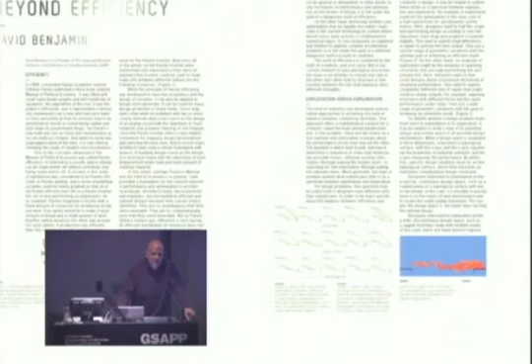Designing design is the first topic. This is something I've been thinking about for a very long time and teach studios here about — really about the role that algorithms play in our design process, and the fact that they're becoming so prevalent that in some ways it's no longer an option to remain distant from that. The design of a design system itself is becoming a problem for architects — we can no longer just allow software to structure the context in which we design, but actually we have to get involved.

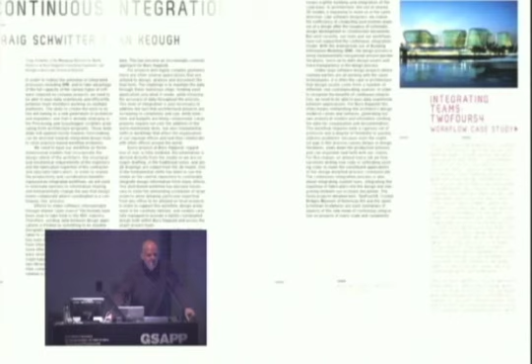Many of the authors talk about this. Some present case studies where they invent custom tools within their office to do task-specific jobs, often about filling a gap that a standard software package can't do—taking information from one software package and having it communicate with another. In many cases, you'll see enormous opportunities open up.

In this case, the diagram on the right is an interesting output from the computer model, taking digital information from the model and coming out with analog instructions to send to a loom to weave this net. So the workflow was about stepping out of the digital into the analog.

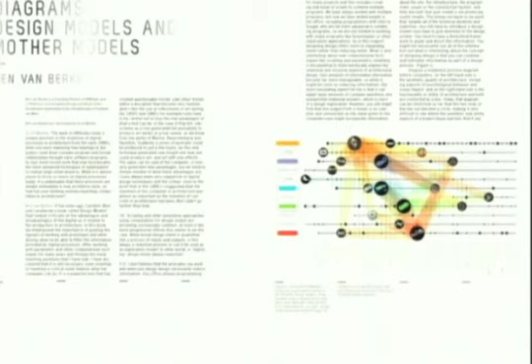That kind of play back and forth between digital, analog, digital, manual is something I think is just starting to really be talked about, and something I think is going to be very important as this technology develops. The first few years were really about making it digital, full-blown attempts to create pure digital workflows in design and construction. And I think the reality that's starting to emerge is that it's simply not possible or even feasible.

So the question then becomes, when do you step in and out of this process? And it's something which, again, is more of a design problem than a technology problem.

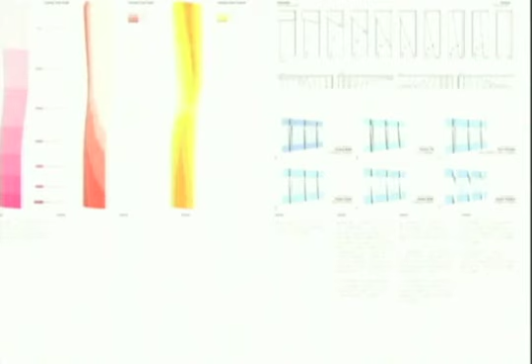Some of the authors are skeptical. I purposely invited people to contribute that weren't just gung-ho about the technology, but were rather reflective about its potentials and its limitations. Neil Denari is one of them. He's associated with digital processes, but having built several projects now, he's begun to reflect on how far the technology can go.

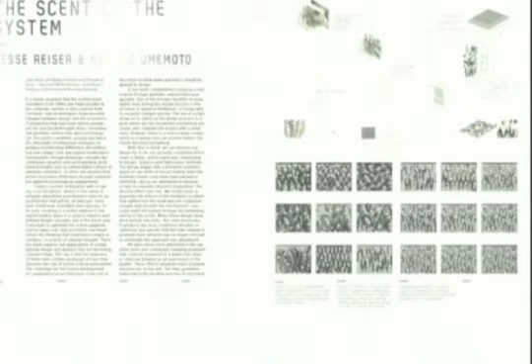One of the more interesting discussions I had was with Reiser Umemoto, who said right from the start, this is not our world, and we're very skeptical. He used an interesting analogy to describe that: it is absolutely possible to derive mathematical formulas from a Mozart sonata, but debatable whether you could run the process in reverse and come out with a Mozart. His point being that he was questioning the capacity of digital tools to actually embrace and encompass the full range of possibilities that lie outside of the digital.

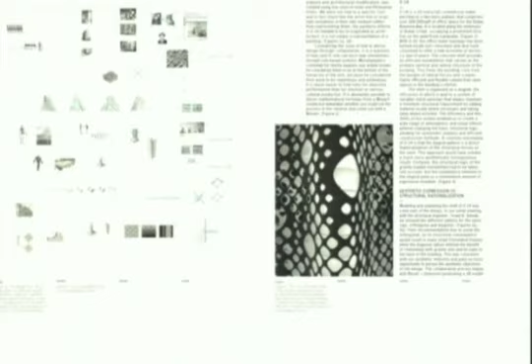The next section is designing assembly. This topic directly relates to digital fabrication, but I purposely didn't use that term, with the intent of trying to move beyond just this idea of file to fabrication and looking at the possibilities of architects starting to think about assembly processes through fabrication.

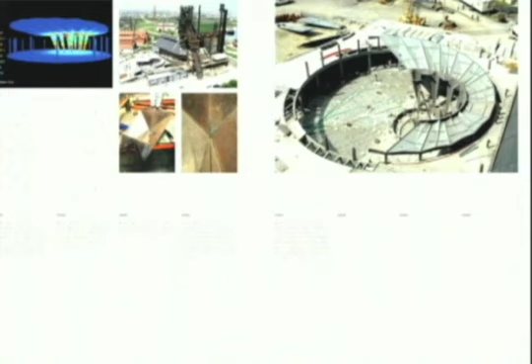So instead of just thinking about drawings that can be sent to CNC machines, it was really about understanding the broader implication of that, and understanding how assembly logics could be embedded in design processes by taking that information and front-loading it in a design process.

Several of the authors deal with this. Barkow Leibinger has done some very interesting work where they literally look at the specific constraints of machines and then pull that into their design process to generate concepts. So designing assembly is, I would say, the middle part of this process of design, assembly, and construction and industry.

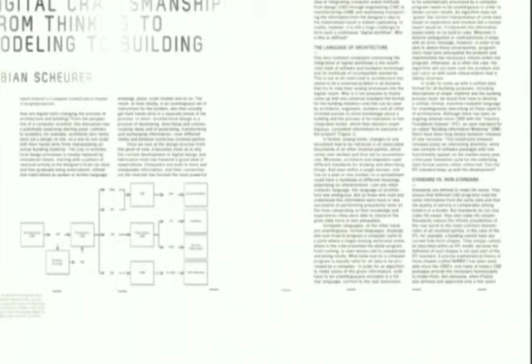A couple of the contributors fall into the category of consultants who, at this point in the development, play a critical role in bridging design and construction. Firms like Design to Production and Gehry Technologies essentially play the role of taking design ambitions that architects come up with, linking it to processes of fabrication, and digitally making that connection.

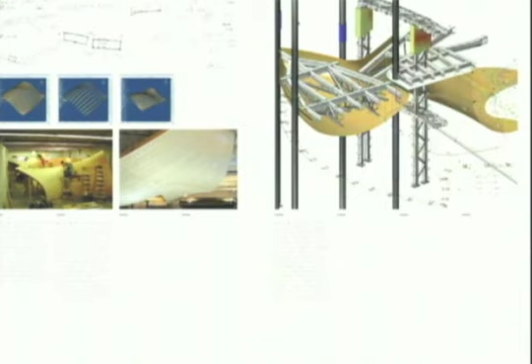The partner from Design to Production told an interesting story about the project shown in the book, where he was hired by a contractor who had bought out the project and had no idea how to build it. So they worked very carefully with a timber construction company on the logistics of the site, took all these bits and pieces of information important to develop the workflow, encoded that in the process, and developed a link between the design drawings and the fabrication drawings. Gehry Technologies works much in this vein too, and is trying to expand their services to deal with larger organizational issues around projects.

It's also interesting in this drawing that sketches are still alive. Sketching is in some ways critical in clarifying design intent in order to translate it into code. So a lot of people worry that the direct hand-eye coordination connected to sketching is not part of this process, but in fact it very much is.

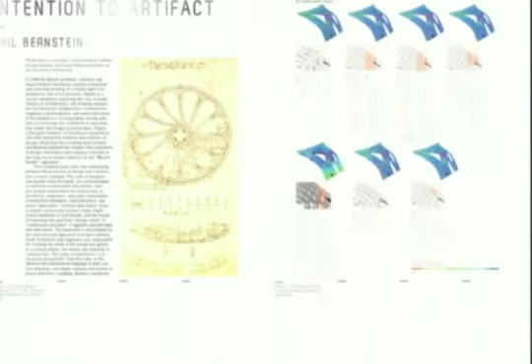And then the last part is designing industry. This section of the book looks at larger organizational issues occurring in industry around integrated design and construction processes. It looks at the current status of developments around BIM and IPD, but also tries to go beyond that, taking an opportunistic look at what is possible through these processes, not limiting it to what is currently being deployed in industry.

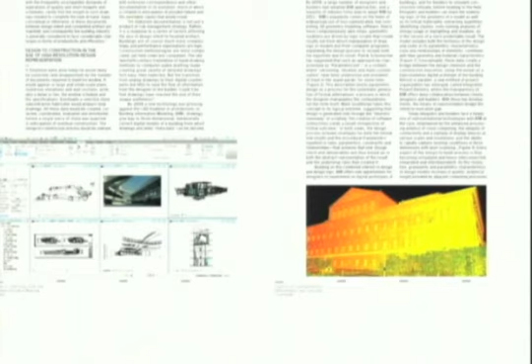So in some ways it takes a position that BIM and IPD are addressing logistical issues within design and construction, but it's not clear what impact it has on design yet. That's something that as architects we have to be very careful and aware of. Offices like Morphosis, who have always had a very intimate relationship with their fabricators long before digital processes, have just been able to take that interest and relationship to another level.

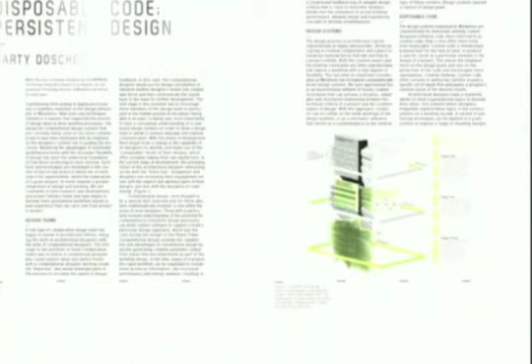Related to the role architects can play in this, Thom Mayne, in one of the discussions we had in preparing the book, made the point that if architects don't continue to design challenging projects, even with an aggressive aesthetic agenda, the tendency of this technology left to industry alone will lead to very generic processes and results. He took an adamant position that without design, without architects, the potential of all this technology runs the risk of gravitating toward very generic results.

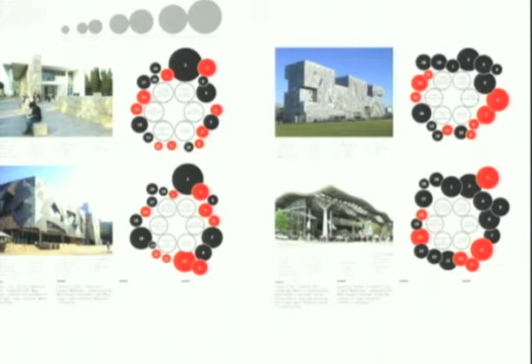And then finally within this category, Paolo Tombesi, who in some ways is the outsider in this group, takes a very different look at the topic. He really analyzes and theorizes the construction industry in ways that are not very common, honestly, in the States. He's based in Australia and does very interesting work looking at the after effects of construction, analyzing labor relationships and contractual relationships. He understands what happens after the fact and then generates a database that potentially can become part of an information model.

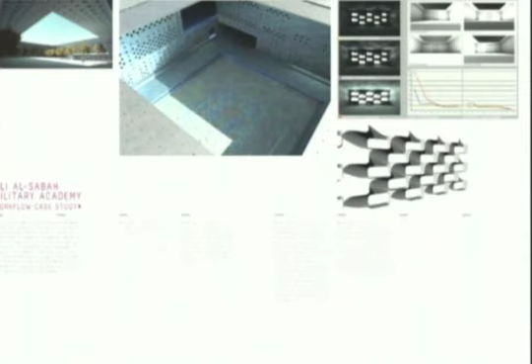And this is an aspect of the industry side which is largely untapped but has enormous potential. In other words, an information model is just that—it will take in whatever information someone finds useful. And the more we expand that, the more I think we begin to uncover new potentials.

And the final contributor, John Nastasi, presents the work from the Product Architecture Lab at Stevens Institute, in some ways one of the pioneering schools around this topic. They've been doing this work probably for 10 years that a lot of people are just starting to see. In some ways they're very much ahead of the game in trying to understand the relationship and potentials between academia and industry. I think it's something a lot of schools are touching on and struggling with right now, including this one.

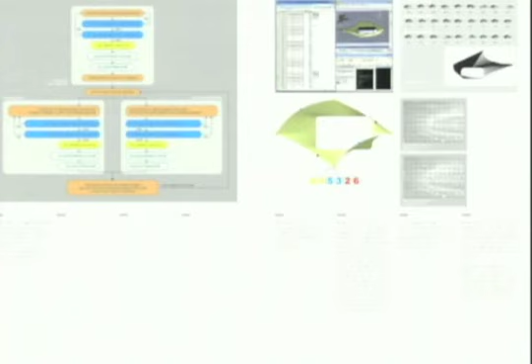So we'll go to the other three presentations and then have a brief discussion. Three speakers tonight, and I'm very excited about the three people that have agreed to do this, and that they come from very, very different perspectives on this topic.

David Benjamin, who anybody who goes to school here knows very well, is the director of the firm The Living and director of the Living Architecture Lab here at Columbia. He's also a professor here. What I find really interesting about David's work is that he sort of misuses optimization software—he takes software intended to be used for very specific processes and tasks and tries to open up the potential of that to a very wide design space. It's something that I think is very unique and has enormous interest and potential.

Shane Burger is going to speak second. Shane is a kind of veteran around this topic. He was with Grimshaw Architects when the book was done. He's since moved to Woods Bagot and is the director of design technology there. He's also the director of the Smart Geometry Group.

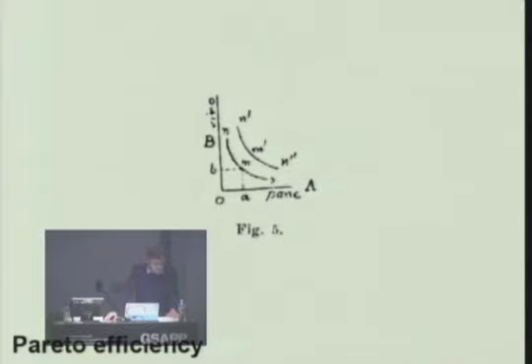But I also think it's very relevant for architecture and the use of digital tools today. One of the concepts Pareto came up with in this book was called Pareto efficiency, shown by this graph here. Pareto efficiency referred to a society where nobody can be made better off without making somebody else worse off. A society in this state of equilibrium was said to be Pareto efficient or Pareto optimal, and a series of potential societies could be graphed so that all the Pareto efficient ones fell on a Pareto frontier, the series of best performing arrangements.

As an example, shown in figure 5 in the book, Pareto imagined a society with a fixed amount of resources for producing bread and wine, shown on the X and Y axis. For this simplified version of society, one option would be to make a large amount of bread and a small amount of wine, another option would be vice versa. For each option, if production was efficient, that version of society would become a point on this Pareto frontier, this curve here. Since all the points on this curve were mathematically equivalent and optimal, this frontier of points could be used to study trade-offs between different options for distributing resources.

For me, I've found that this Pareto frontier is actually embedded in a lot of the computational tools I use, and the framework behind this graph and concept is very useful for some of the ways I've been using computational tools. This principle, Pareto efficiency, can be used for the design of many problems, not only the distribution of resources in a society. Engineers use it a lot, referring to this Pareto efficiency frontier.

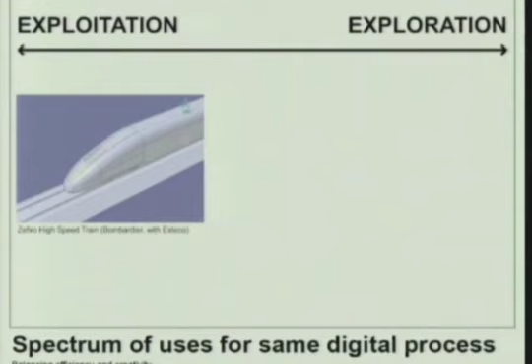So one last idea that's been helpful for me before exploring a few examples is this spectrum, again coming from kind of mathematics, but I think with useful applications to architecture, a spectrum between exploitation and exploration. Algorithms can be used to exploit small differences and achieve a very efficient result, as shown on the left example there, optimizing the nose cone of a high-speed train. But the same algorithms can also be used to explore a wide design space and to try to derive novel results, to try to achieve some amount of performance, but also to uncover something that wouldn't have been uncovered before.

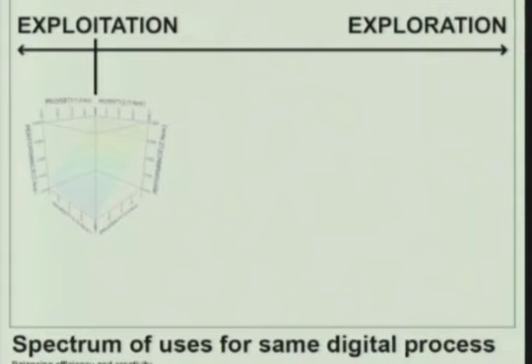And I guess my own thinking for this essay was framed around the idea that, as architects struggle to balance the power of computation with the need to maintain some kind of control and creativity, as architects are trying to place themselves on the spectrum between exploitation and exploration in their use of design tools, then the workflow is kind of the site of design, where they stake their claim, where they decide how to use these processes, where they decide how to move between qualitative and quantitative goals.

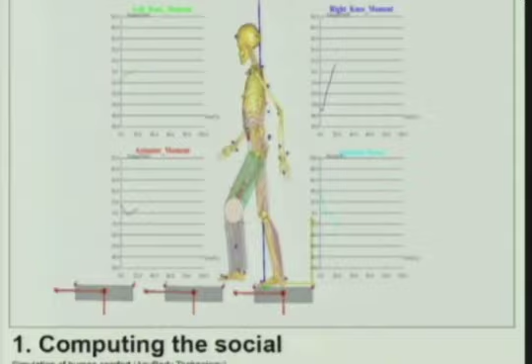And along those lines, my contribution to the book had me thinking about 5 specific ways that I think could be interesting and useful in navigating through this new territory. I want to just describe 3 of them very briefly here. The first one is what I'm calling computing the social. And this is basically the idea that many aspects of design, which formerly were probably thought of as qualitative or almost by definition impossible to quantify, are now being encroached upon by quantitative tools.

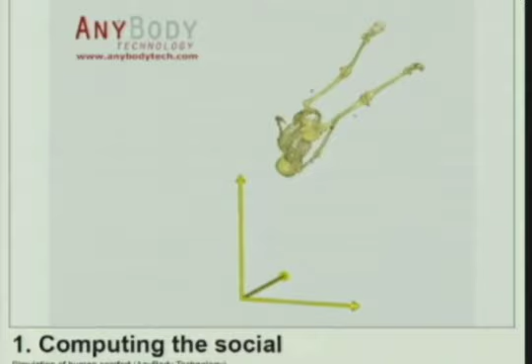So this is a company called AnyBody Technology. They model things like this, basically modeling ergonomic comfort. So comfort, typically a thing that we would think is qualitative, it's hard to describe in numbers, but it turns out, as in many aspects of our society beyond architecture, there are people who are developing more and more powerful computational tools with more and more data to feed into them, and they're able to start simulating things like this.

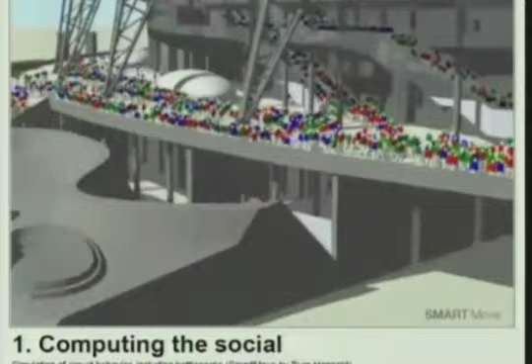This is related, still the same topic, to tools that are doing things like modeling crowd behavior. This tool called SmartMove by Buro Happold is actually like several other tools that exist in the industry. In this case, modeling the flow of people around a stadium. This is one of their demos of the ability of this tool to show visualizations in real time, to be manipulated in real time, to identify things like bottlenecks, but also the most likely paths that people would take. They show kind of heat maps of where congestion is or where problems are.

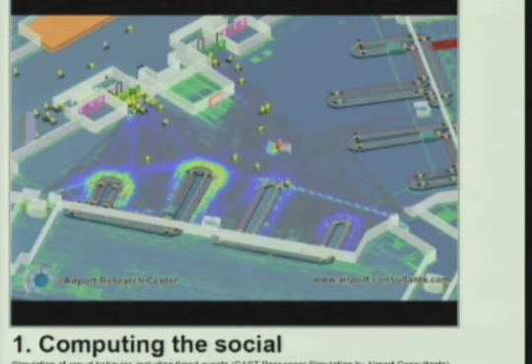And it's the start of modeling these things that seem certainly possible, but also a kind of new frontier, and maybe even in some cases make us a little uneasy—the idea of modeling movement of people, comfort of people, behavior of people, something that seems beyond computation in a certain sense. This tool, very similar, used for simulating things inside airports, and it includes the study of timed events, like when certain flights arrive and where people would go to pick up their luggage.

This is now being combined in a very interesting way, which I won't go into now, but I learned a lot about by talking to the people at SOM who design airports, including Derek Moore, who was a great advisor to me on this piece.

He let me know that although in the design of all the airports SOM does, they use these intense computational tools and simulations of people like I just showed, they also still do a lot of surveys and field observation, asking people when they show up at the airport: what flight are you arriving for? How early do you get to the flight? How many bags are you carrying? Did you arrive by public transportation or by car, etc.? It turns out these things, for the moment, are beyond the ability for SOM to integrate into a computational tool, but still very important to the process, and also still very quantitative, but not yet modeled.

And it turns out the behavior of people is very different in different cities, which makes sense. And of course, this is related to William Whyte's studies, which probably everyone knows a great deal about.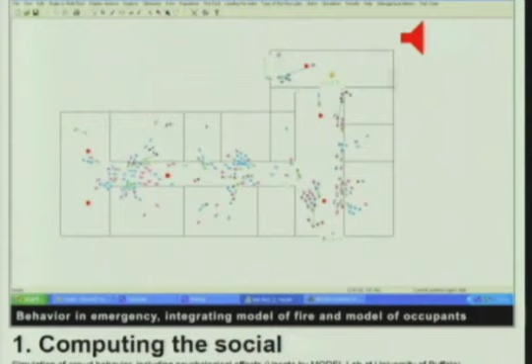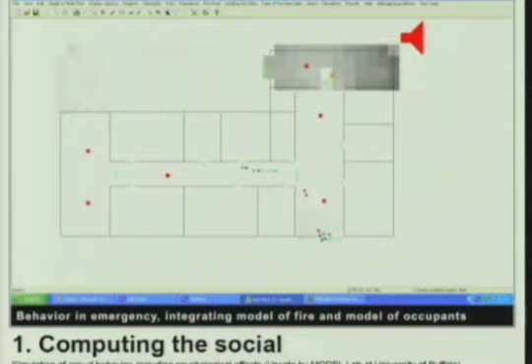The last example along these lines, which I think is potentially the most interesting, is a series of tools, including this one called Vacate by a lab at the University of Buffalo, which is trying to model psychological behaviors. So they're modeling crowd flow through architecture, like the previous model by Buro Happold, but they're really trying to study things like the effects of a group sticking together.

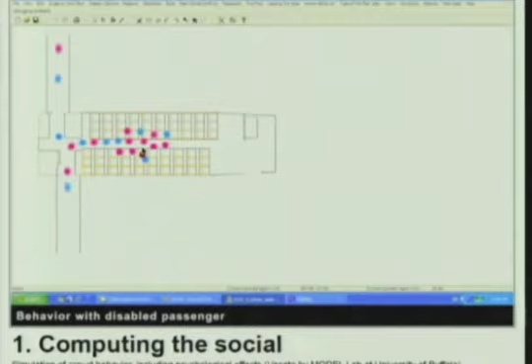Shown by these dots here, in evacuating an airplane. So how do people behave, not just when they have a single uniform rule between all people, but when they have different needs based on their profiles. This is modeling the behavior and evacuation of someone who's disabled and how that would work.

There's also the modeling of panic, which was shown earlier in the example with the smoke alarms. And this interesting comparison shows how evacuation would work when comparing competitive behavior versus cooperative behavior in general, the kind of psychological vibe of the plane when the evacuation is happening.

So I think this is the tip of the iceberg for a series of tools which will be coming and which are already here, which will model these things that we used to think of as impossible to model, but now might be possible.

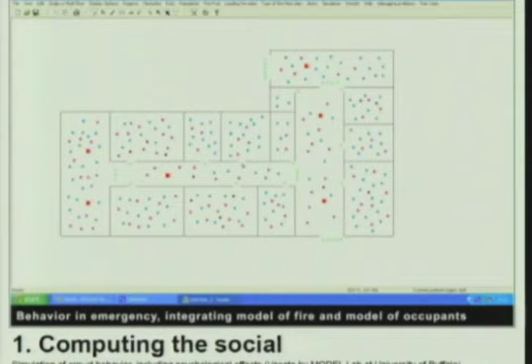The second example I want to describe briefly is the idea of using optimization creatively, and that's what Scott introduced already. This is a project that my firm, The Living, worked on in collaboration with Buro Happold, who were the engineering consultants. We were basically trying to design a fixed canopy, shown by this gray frame, and try to determine what would be the best structure to support the canopy.

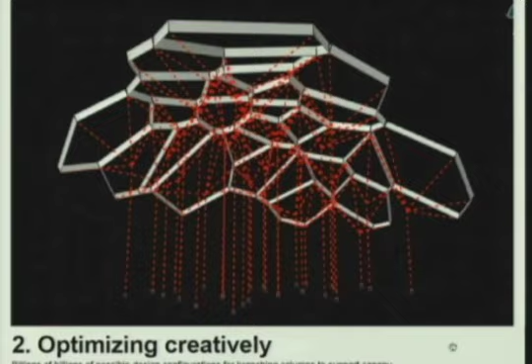So if you consider all of these dashed red lines to either exist or not exist, the idea was let's explore which configuration would be best. There are literally billions and billions of possible configurations, so we used computational tools to help us explore that design space.

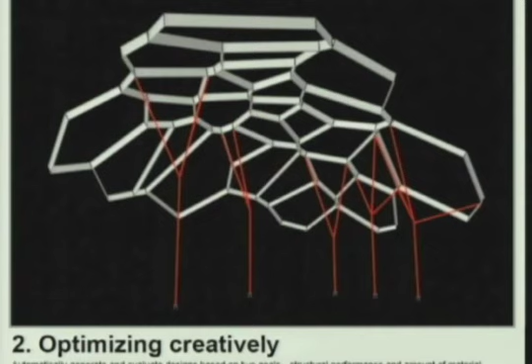To make a long story short, we basically set up a system where an algorithm would turn on or off different sets of branches. Then we would analyze each model in this structural software, Autodesk Robot, get a structural score, and try to optimize for two things: best structural performance, and also least amount of total red material. So it's a fairly straightforward optimization problem, often used by engineers and architects. It's not unusual in a set of goals to have best structural performance and least amount of material.

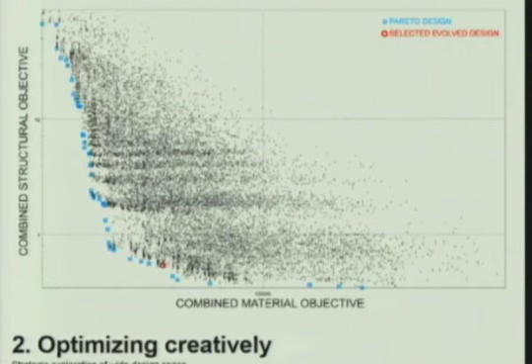Like many uses of optimization software, we generated thousands upon thousands of designs - these are 25,000 different designs. The blue points are actually our Pareto frontier, looping back to that original diagram from 1906. This is a feature built into the software, so Pareto's affected this software for optimization. We honed in on this design here in the red circle, partly because of our design choice.

This structure looked like it might be a dome, and a good way to support a dome would be around the perimeter, but it turned out it was probably behaving more like an arch. For an arch, picking up the structure at these 2 points - especially since it was not symmetrical, since it didn't go as low on the left side as the right - picking up the structure in those two places was probably a good solution, and it turned out to be the one we constructed.

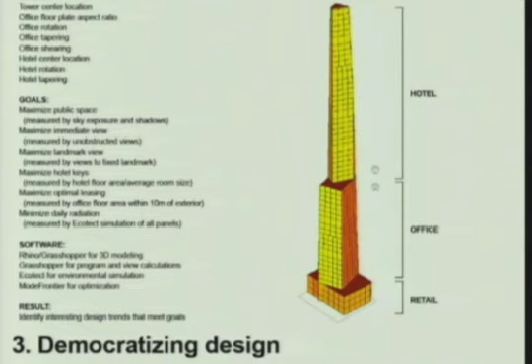This is an exploration of a tower design with a mixed-use tower - hotel on top, office and retail - with a series of inputs and goals. I won't go into how this workflow works, but there's a variety of different design permutations possible, different ways to graph the designs according to multiple objectives - some having to do with landmark view, some with percent in leasing depth, so financial returns, some with public space, and some with radiation, so environmental metrics.

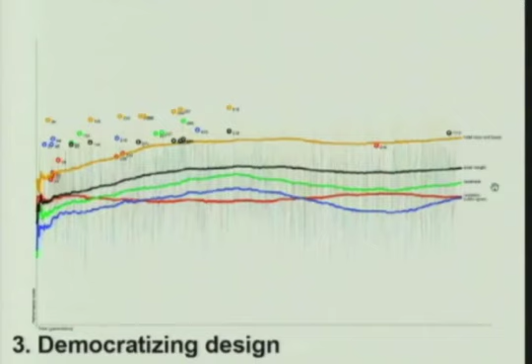All of these visualizations are part of the normal set of design tools used in this multi-objective optimization. But what's most interesting to me is that these same design tools, which could seem like they produce a design that's inevitable, that's just efficient, reducing creativity to cold-blooded efficiency - they may actually be used, if there's the motive and will, to debate values, to discuss what is most important. As soon as you have a score for public space, environmental performance, and financial return, you can start pushing and pulling the filters, the levers, deciding which should have more priority, and basically debating what is important about design in a way that's sometimes difficult when design is more intuitive and the process is more opaque.

This is an example of tools built into the design interface where you can filter out designs by pulling these green levers. Each bar is one of the objectives and how your design scores on it, so you can start filtering out designs, and it can be very clear to all stakeholders which ones you might want to filter out. You might filter some out that rotate more or less based on an aesthetic concern, and maybe all the players in the design process would have to agree on that, from client to engineer to architect to contractor.

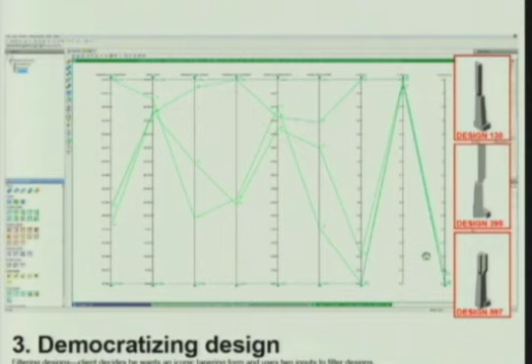You could push and pull different levers, and you basically hone into different types of designs depending on which levers or filters you're pulling.

A final way offered by this tool is that after you've generated thousands and thousands of designs through the automated, so-called optimizing process, you don't achieve a single best design. As Pareto observed, you have a set of designs, which requires a choice, a trade-off, to decide which design you will choose. But also, after the fact, it's mathematically very easy to refilter the designs based on reweighting the objectives. So here's a baseline scenario.

You probably can't read this text, but each one of these corresponds to a different objective—remember environmental performance, financial performance, public space performance. You're getting different scores for each, but you could decide that maybe public space performance should be twice as important as financial return, or vice versa, or that environmental performance trumps all and should be three times as important.

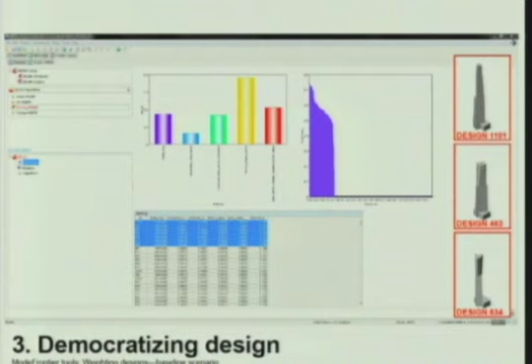Once you reweight those, you get a series of different top designs with different forms, and this tool becomes the focus or the enabler of a debate about design that could extend not only to the typical stakeholders like designers and engineers and clients and contractors, but also to the public.

Finally, to complete the circle for me, just a brief observation: Pareto himself, Vilfredo Pareto, who was important for me in framing this context of computational tools, has a story that's actually interesting and fitting. In 1916, ten years after his first book, he started to distance himself from it, and he published a completely different book, equally large and full of his treatises, called The Mind and Society, a treatise on general sociology.

By that point, he had resigned from the chair of political economy at the University of Lausanne. He had tired of the oversimplification involved in economic theory, become disillusioned with the terrible track record of economic predictions, and abandoned the fundamental economic tenet that people act logically. Instead, he said that people are non-logical, but they believe they are logical.

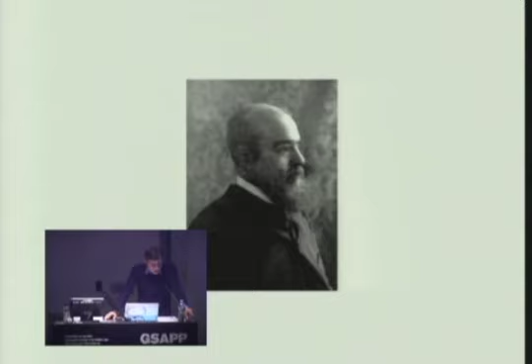What I am arguing here is that perhaps the same is true for our early versions of digital processes in architecture. Perhaps they need to be reevaluated and transformed. Perhaps there needs to be more. The real question is how much of the original model will remain, and whether the new framework will look anything like the one which has been so influential and has taken us so far. Thanks.

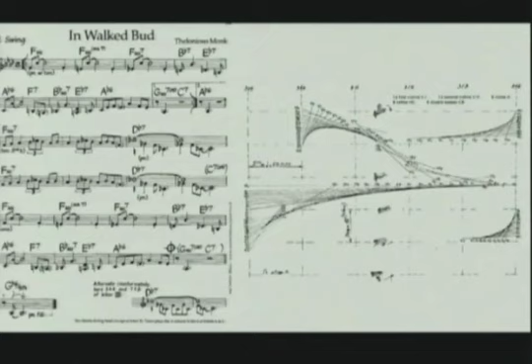Some of my work I'll show is from Grimshaw, which I started at in 2003 and finished up in 2011. I'll also show some work from my current firm at Woods Bagot, and then a little sprinkling of some Smart Geometry in there. And lastly, some examples of work from people whose work I admire from around the world.

So the first one I'm going to talk about is specifically the automation of the analog. It's talking about communication downstream - communication where you have something you've designed and you want to communicate this to a certain fabrication process.

This is design as manifested through digital processes directly. Now, the big question that comes up: what is it that you need to communicate? What do you need to hand over to the contractor, hand over to the fabricator for information?

We're kind of blessed with this idea when we're in university - we get very used to the concept of handing over information to fabricators directly. We're going to make things directly with machines all the time. It doesn't happen all the time.

This specifically is an example of work - the Fulton Street Transit Center, which is in Lower Manhattan. A perfect example of working for a government institution, where there was a very strong line between our design intent and the means and methods at which it was going to be built.

So in this case, we knew that we couldn't count on a particular fabrication method, but we had to communicate our intent. We had to communicate the idea of how this thing could be built in a variety of different means. Now, we did meet with Permasteelisa - we met with a bunch of different fabricators who gave us some sense of where we could go with this.

And we ended up with what is effectively a geometric method statement. This is fairly common in architecture, for any sort of complex geometries. You'll try to find a way to describe that geometry such that anyone can open it up in any software platform, any type of fabrication method, and rebuild it using the techniques that they want to.

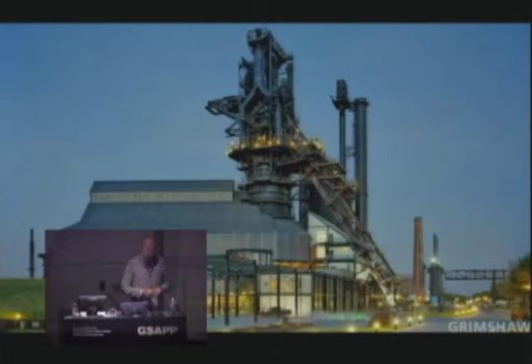The second method here that I'm going to talk about is other methods of communicating besides geometric method statements. This is specifically a project called the Museo del Acero, in Monterrey, Mexico. And the part I'm going to talk about here is the cast hall, which is the outside of those louvers that you see. It's kind of glowing a little bit from the inside. Trust me, it's not on fire, but it's supposed to feel like that.

The idea with this one is all about geometric control systems, and geometric control systems that give you a very simple, clean output that was necessary for the assembly on site.

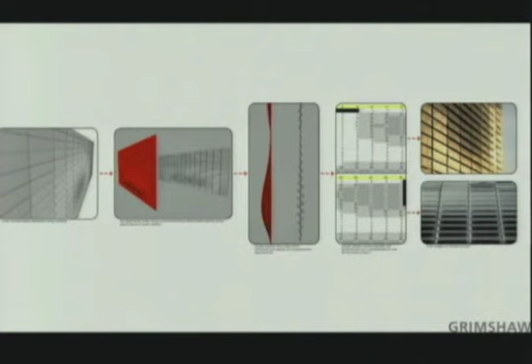So on the left side, you see the overall design intent, which is a nice, smooth opening of the louvers on each facade. Next piece in, you see the control system, which is very much like a sheet of paper. So if you want to bend something up, it rotates the louvers correspondingly. Fairly simple system, but we wanted it to be as playful and active as possible for us to do a lot of push and pull in this.

And as we move further down the line, you see it just goes out to a schedule, out to an Excel spreadsheet.

Now, this specific case here, what was interesting was that we received the request for the final design on a Friday. It was already built into a parametric system for manipulation.

So on Saturday and Sunday, I sat down with the project architect. We did a lot of push and pull. We had one screen up - I had two large screens actually. One which was the graphic representation of what we were getting as well as the push and pull, and on the right side was the data that was being output.

This was around 2006, 2007 when we were doing this work. The benefit was we were able, in a live way, to work everything from the original design concept all the way down to the information that had to be handed over to the people doing assembly on site. The schedule was given to the contractor on Sunday night, and louvers started rotating on Monday morning.

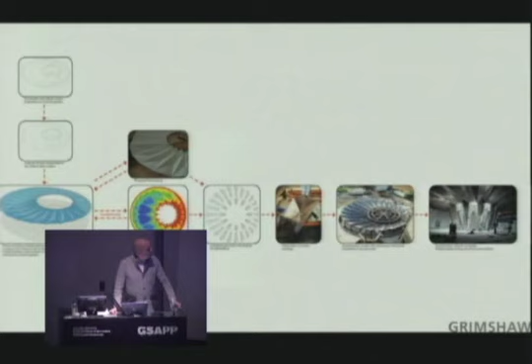Another example of this workflow is symbolic of this concept of designer as tool builder, and this is something that comes up a lot within parametric and computational circles. This is another portion of the same project - the steel gallery roof.

On the left side, you see the design concept, kind of a folded metal plate structure. The intent was to use the structural properties of folded metal plate in order to carry the load, to carry the distances that we wanted to have.

We want to be able to manipulate the inputs and the outputs and to have an iterative feedback loop. So what you see here is basically a representation of physical prototyping, of structural finite element analysis, and artificial illumination and acoustic simulation, which then gets handed over to a different type of fabrication method, working with a different subcontractor down in Mexico.

In this case, though, what we have to understand is that the drawings and assembly sequence need to be reflective of the local trades. Again, we can't just hand anybody the same set of drawings - we're not handing them a 3D model. They're going to build it the way that they're used to, so you have to speak their language. You build in that ability to speak the language of the local trade so that they can build exactly as you had originally designed.

Another aspect of this process, the automation aspect, there's a good example in the translation of design into G code. If you read the piece by Fabian Scheurer from Design to Production, he talks quite a bit about the use of G code, and there's a couple of other pieces in there as well about this.

This is specifically an example from the Smart Geometry workshop in Barcelona in 2010. We got to take over an old toilet factory - no toilets left over, but it was a nice big, open and loud space - and got to play around with KUKA robots, automated fabric cutters, industrial laser cutters, a whole series of different machines.

This specific team developed a conceptual form and then automated the cutting process using a KUKA robot. There's automatic script translation down the line, so they knew what their fabrication method was going to be and were able to automatically generate that code without having to go through anybody else.

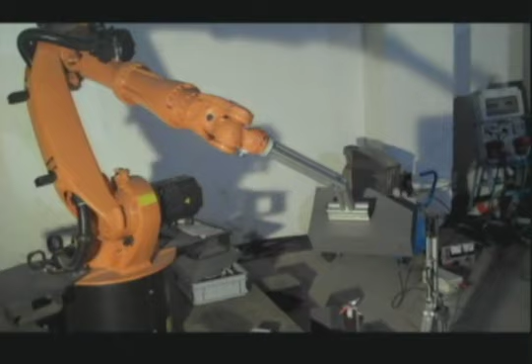The same group did some work a few years later, so you may have seen the quadricopters flying in these same sort of foam bricks. I don't know if we're quite ready to use quadricopters to build skyscrapers, but it gives you a sense of where these things could be going. You're thinking about the downstream fabrication process and building a system that will automate that through.

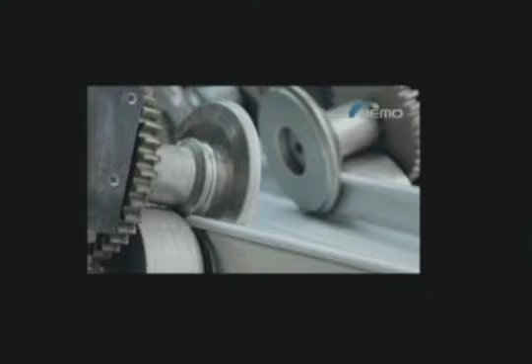This is actually a nice animation. There's a certain amount of lust that certain people get about watching robots make things, and I'm one of those people, so I enjoy this type of stuff. This specifically is from Bemo, who does automated standing seam metal roofing. The whole piece of equipment is actually inside a shipping container, so it can be brought directly to site.

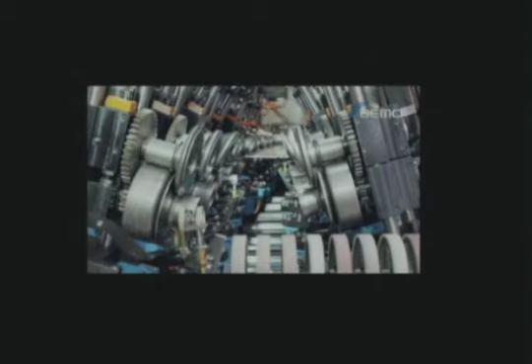There are many instances where digital fabrication has enabled us to do things that were not economically feasible before. This has had, though, I would argue, a limited effect upon our ability to really push the design process in consideration of digital fabrication and craftsmanship. It simply enables us to have a faster result at lower costs, and doesn't always provide us with new methods of craft that will actually transcend this technology.

The question I always ask is, now that you have access to this type of technology, what are you actually going to do with it? Hopefully it's something more interesting than just purely automated repetitive tasks.

There are opportunities here. There's a recent article published last week that was quoted as saying software is eating manufacturing. It talks very much about this new working class in the United States where it's less about labor and more about coding. There are opportunities as the United States transitions to modern fabrication methods, more use of digital fabrication, which can provide us with an opportunity to re-engage craftsmanship.

In terms of augmentation, how you further augment the design process, how you bring in material information, how you bring things forward — talking much more about communications in both directions, upstream and downstream, designed for both material and machine. Upstream, it provides us with the physical constraints, and it brings forward the process of making to inform concept design.

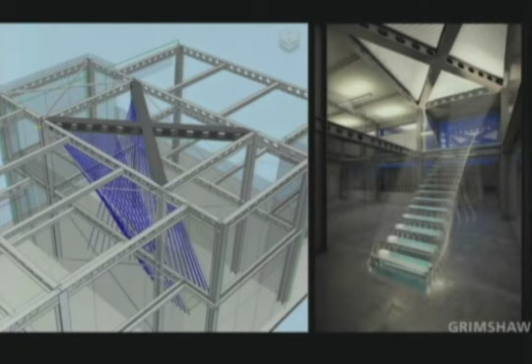By taking on different types of parametric tools that were originally created for the industrial and product design industry, it allows us to jump into things like solid parametric models, which enable an active dialogue with the physical when we get all the way down into detailed design.

Simulation also offers an opportunity to simulate fabrication and assembly processes and embed material efficiency. This process can be engaged very early in the design process.

This is a project I had a chance to work on with a couple of people in both our New York and Sydney offices. One of our guys, who I don't think is actually here, has been leading the process on this. It's called Wynyard Walk in Sydney, Australia, which starts to take into account material, fabrication, cost constraints, and assembly very early on in the concept design process.

So even in schematic design, you have the opportunity to work with potential fabricators and to think about new opportunities in digital fabrication and assembly techniques. This sort of method enables you to work at multiple scales and multiple levels of abstraction, from concept through to construction. It also allows you to start considering simulation of assembly, which is something continually talked about.

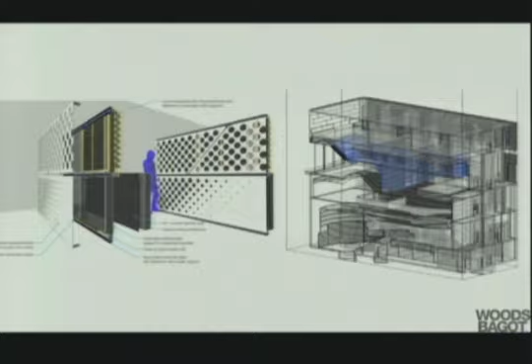One of the things contractors benefit from through BIM processes is the simulation of construction sequences. Through engaging that simulation, we can create much more efficient building processes. I'll skip forward a bit in the interest of time.

As design and construction move toward processes inherent in product design and manufacturing, material and fabrication processes, through simulation, become an opportunity for creative use in the design process rather than a late-in-the-game constraint. We're able to actively engage fabrication techniques and material constraints.

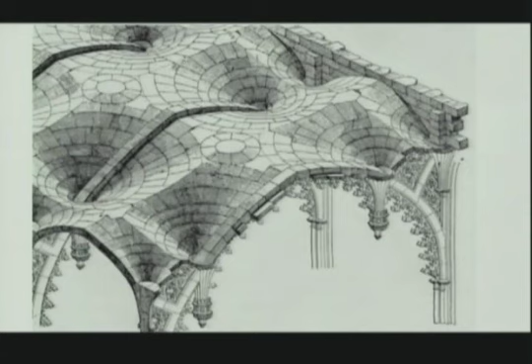This is further extended in his work looking at historical Gothic church designs, specifically non-reinforced masonry vaults. It represented a desire to discover how these vaults operate structurally through material and form, and to embed that in a new design space for his own creative exploration.

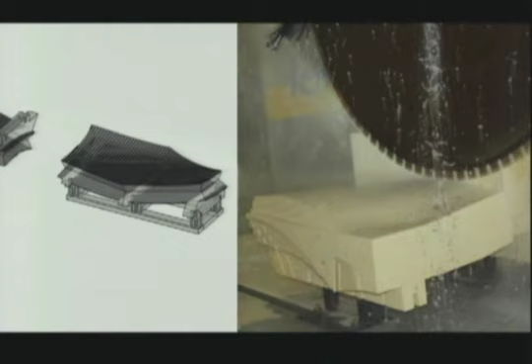This allows live regeneration of the block patterning during form exploration, with embedded material and structural logic. The logic of fabrication also serves as a constraint for Philippe, ensuring the entire system is possible on the equipment given to him. It allows a simultaneous connection between form, structure, material, fabrication, and even assembly.

Now, not all of us get to work with a saw like this on the right side—it's much larger than I think I've ever seen. It'd be a little frightening to be near it, but it gives him a tremendous opportunity to realize very large-scale forms and design everything from the original concept down to fabrication and assembly on site.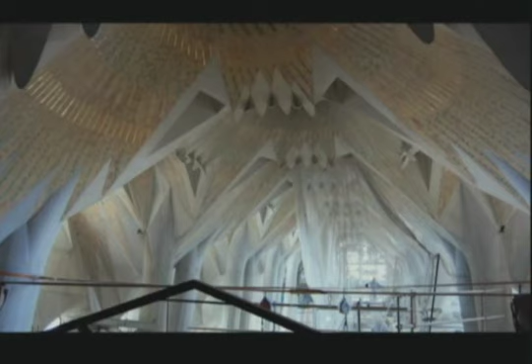Exemplary use of material and fabrication in pursuit of craft can be seen in the work of Gaudí, especially the modern work happening at Sagrada Familia by Mark Burry and his team at RMIT. Through consideration of the geometric aesthetic defined by Gaudí, and integration of classical and modern fabrication techniques, it allows a new kind of modern digital craft manifested in the physical world. It's through this integration of the digital and the physical that we can transcend the limitations of either.

What I start to notice when we look at the next generation of designers—some call them millennials, and I'm sure about a third of you in this room are in that group—is a much stronger interest in making things. It's about a desire to make the virtual manifest in the real world. Everyone in that group, and in the generations around them, takes cues from the mixture of the physical and digital world, and is interested in working as a collective of voices, not a single voice.

Our goal should be to enable a continuous design-to-production workflow: to design the environment in which we explore form and performance, to design the environment in which we realize form and space through materials and assemblies, and to design the conditions within the industry where we can develop the next built environment. It's all about communication—how do we convey design intent, how do we listen and integrate the input of others, and what can be automated and put into a rig to enable creative freedom in this workflow?

In a way, this is something I've been thinking about since I started teaching professional practice at Yale. It feels like a really long time ago. So this semester, I decided to explore the problem in a different way. What I'm going to do, very quickly, is take you through an argument that suggests some of the themes David and Shane have talked about—the mythology of design intent, the relationship between the creation of that intent and how it's executed—has to be positioned not only through tools, not only through procedures, but in the business context in which all this is going to happen. I'm just now starting to work on this problem.

So this question of the value proposition—what is it exactly that delivers value to the exercise of making a building—I think is a kind of secret sauce or catalyst that'll let us think through this problem.

I'm teaching this course this semester with Brian Kennan, my professional practice counterpart up at Harvard, called Exploring New Value Propositions in Design. We're looking at different business models, the nature of the supply chain, what other designers and artists do, and how their activities translate into value, because that value, at least in the business context, is how different players get positioned in the process.

My students have been going through an exercise of basic concept building, and one of my first teams tried to explain to the other seminar students what a value proposition is. The first sentence from Wikipedia says a value proposition is a promise of value to be delivered, and a belief from the customer that value will be experienced. So there's this idea that a proposition is going to do something in the process, and that proposition is going to receive something in return.

Interestingly, that led immediately to the existential question we've been talking about tonight—the mythology of art versus what Scott was calling procedural efficiency, or the mythology of insight. Can architects somehow synthesize and see things differently, versus optimization of process?

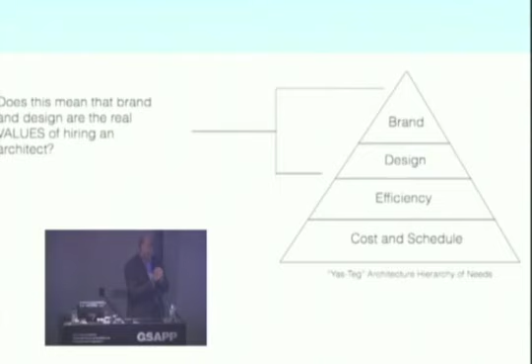They immediately asserted, in week one of the seminar, that efficiency, cost, and schedule are things for contractors, and architects should only be focused on design and brand. This gave us some really interesting food for thought.

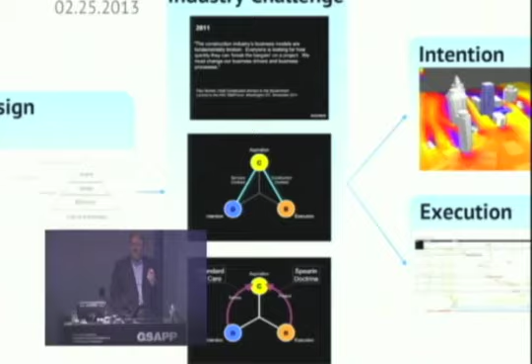If you're going to explore this question of the mythology of insight—the question of the deliverable, the ineffable, versus procedural efficiency—you have to interpret it in the context of the larger economic forces driving the industry. I've gotten to spend a lot of time thinking about this over the last couple of years.

The basic value problem was articulated by Paul Morrell, the chief construction advisor who's been driving the BIM agenda in the UK. He said the construction industry's business models are fundamentally broken—everyone is looking for how quickly they can break the bargain on a project.

So when Shane talks about the distinction in a public project between intent and execution, he's talking about the client attempting to control the breaking of that bargain. We must change our business drivers and our business processes.

The overlay to what you've heard in the previous two talks, in my view, is this question of the value relationship between the desires of the three players in the process. This is Pareto, in the second part of his career, I guess, David, right?

The client wants this thing called a building but doesn't really understand how to get it. A designer is going to create this very abstract notion called intention—when it's done, I think I'd like it to do these things. And the builder is going to actually execute it.

Yet we use these weird artifacts called services contracts on one side and construction contracts on the other. Services contracts are about thinking about stuff, construction contracts are about making stuff, and there's no integrative association between those two things. So not only is the value proposition broken from the outset, but the sociological structures of the industry are broken also, and they have to be, in a way, attacked.

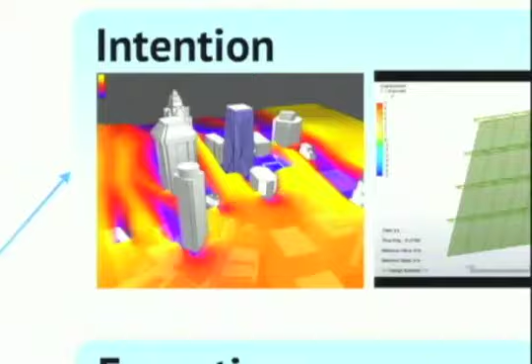David did a much better job of explaining this than I did, but in this day and age, there's a huge amount of analytical information available to a designer. The design process itself is beginning to shift from experience and judgment to knowledge, measurement, and data. And I have much less sophisticated videos than Shane.

But this kind of information about the behavior of a thing as you're designing it is immediately available to the designer during the act of design, which eliminates, demythologizes, or democratizes the idea of the design process and makes results very explicit. So suddenly things are incredibly measurable to extraordinary levels of detail, down to the performance characteristics of subcomponents as the building is really beginning to be put together.

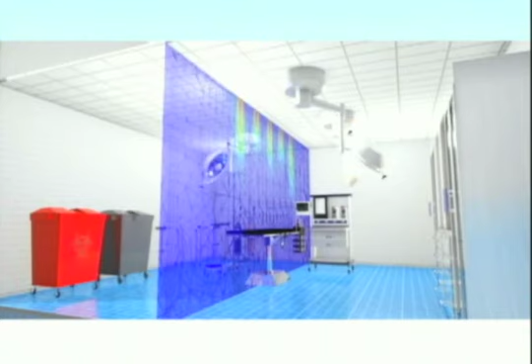And not all of these things are about the architectonics of the building. This is some work we're doing with researchers using building information modeling and computational fluid dynamics to do infection control in operating rooms. If you can understand how air flows in an operating room, you can actually control the degree of infection in that room, and these are the kinds of things computers are really, really good at.

They allow these kinds of analyses to be directly delivered to a designer as that designer is doing their work. But most of our current fascination, at least up to maybe three years ago, has been with using these strategies for the making of form.

This is an image from my chapter of the book that Zaha Hadid's office provided me, and it was really about parameters and scripting and the digital making of shapes, where the value proposition is actually about a whole different set of ideas. It's about measuring outcomes and being able to make commitments about how things are actually going to perform.

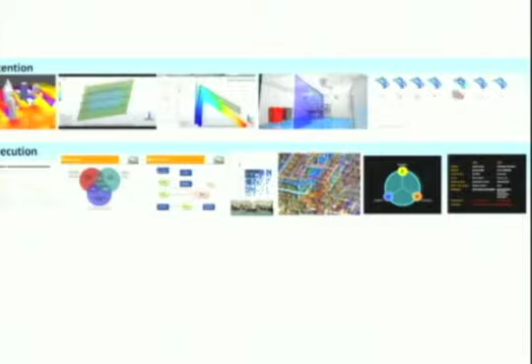If that's really true, we get into a completely different set of questions about what Shane was describing as the communication phenomenon, or the design of the process, and who takes responsibility for the design of the process when it's oriented much less around judgment and the concept of the standard of care, and much more about outcomes and how things are actually going to work.

We introduced this concept to our students at Yale in their second semester when they do the building project, where I put this mathematical model of the house we're building that shows them the relationship between time and money, or why we're going to use a huge amount of free labor to spend $100,000 and build a house worth $500,000 in a low-income neighborhood in New Haven. That has a whole different sort of Pareto-esque set of issues we'll get into later.

What we're trying to introduce to them is that there are parametric considerations even in the beginning of a house design process that they have to think about, and the definition of meta design in this construct of the obligation for the architect to deliver value in the process piece is starting to get much more interesting and complex. This is a slide from my friend Howard Ashcraft, the leading attorney in the United States who works on integrated project delivery, and he talks about the design problem being, in an integrated project, completely separate from the creation of the artifacts.

So somebody has got to create these three design events: the design of the team so it functions properly, the design of the way they communicate with one another so they can achieve the aims that Shane is talking about, and the design of the actual workflow itself.

So in my article in Scott's book, I was really only talking about the red bubble, but the meta design problem is actually all three of these bubbles, and the value proposition that I think architects are going to have to start thinking about is the extent to which we choose to apply the problem of design to all three of these characteristics. And the business models themselves are beginning to evolve in much more complex ways.

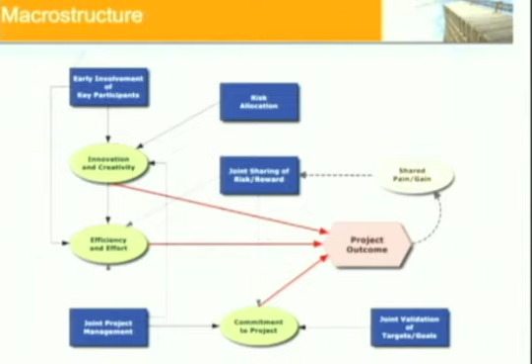The business models themselves are actually, at least in my view, starting to get refactored, and you begin to have to examine the meta design problem in a completely different way.

And I think there's a kind of mythology that somehow if we can get to 3D models that look like this, everything will be okay. This model looks great. There couldn't possibly be any mistakes in that model, right? Everything's perfectly coordinated, and all is right in God's universe if the world is modeled like this. And that's actually not it.

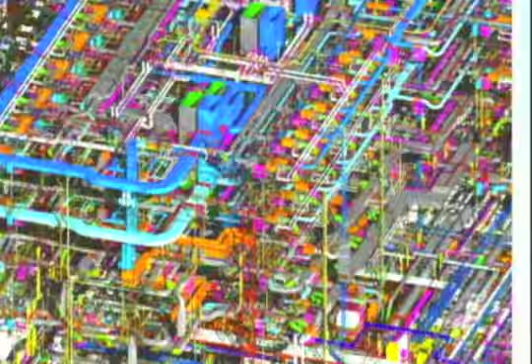Because in my view, this question of execution is about refactoring the relationships between these players. And I noticed when I was doing my project delivery lecture to my students last week that I inadvertently did this peace sign in the middle of this project delivery diagram.

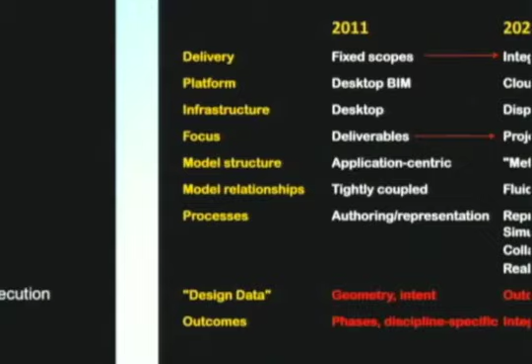And so I don't want to get into this in too much detail in the interest of time, but I do think over the next decade, in this context, there are going to be some fairly significant transitions in the way the basic rules of engagement in the overlay that both David and Shane have described are going to occur. That there are going to be a lot of technological changes. There are going to be a lot of shifts in the use of technology.

But the big change here, the kind of theme that flows through all of this is really twofold. One, someone has the job of conceptualizing and understanding the overall phenomenon that results in the building. There are meta design problems that are design problems, and architects, I think, have to decide the extent to which they are going to position themselves in the design of those processes in order to control the outcomes.

The second piece that's increasingly apparent, I think, in the work that we saw previously and in the work that we're doing right now in our company is we're all working toward the problem of taking disparate piles of discontinuous, elaborated digital information and making them operate like single projects. Be able to look across a broad array of stuff and figure out how to glue it together so the project operates as a single entity. And architects have to decide if they're interested in just the formal aspects of that or they're interested in the performative aspects of that.

And so if I return to this Smythson drawing that was in my article, this is an incredibly powerful piece of process information because it describes, this is Robert Smythson from 1599, describing how to build this round rose window in this curved wall. And all the instructions necessary to execute this incredibly complex thing are encapsulated in this one really beautiful drawing.

And because the nature of the delivery of information in a lot of ways has really changed—and this is where my technology breaks down.

I do think that when you look at the broad trend of the problem, you see that the means of representation through building information modeling and other techniques we've talked about is starting to get consolidated. The means of delivery in terms of relationships of the players is also consolidating, and the timeline view of projects is starting to get consolidated too.

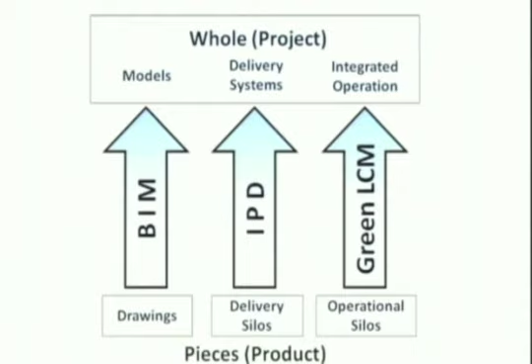So what was once a kind of mythology of integration with all these pieces down below now becomes this problem of the representation of the entire proposition of executing a project. And the positioning question for a lot of architects is, where are we going to be in that process?

Scott, you were probably introduced to Tom Basie when you contributed to my book. Tom Basie wrote this really interesting article in the book that Peggy Deamer and I did about the design proposition, and this concept he calls flexible specialization.

I'd like to make a slightly more dramatic assertion based on a couple years of thinking about this: if we as a profession don't choose to position ourselves in this center spoke and define the design of a building as both procedural—what Scott called the question of procedural efficiency—in addition to the mythology of insight, the mythological and the procedural combined together, then we will, as a profession, be depositioned from the building industry. And the concerns David expressed about procedural construction will come to pass.